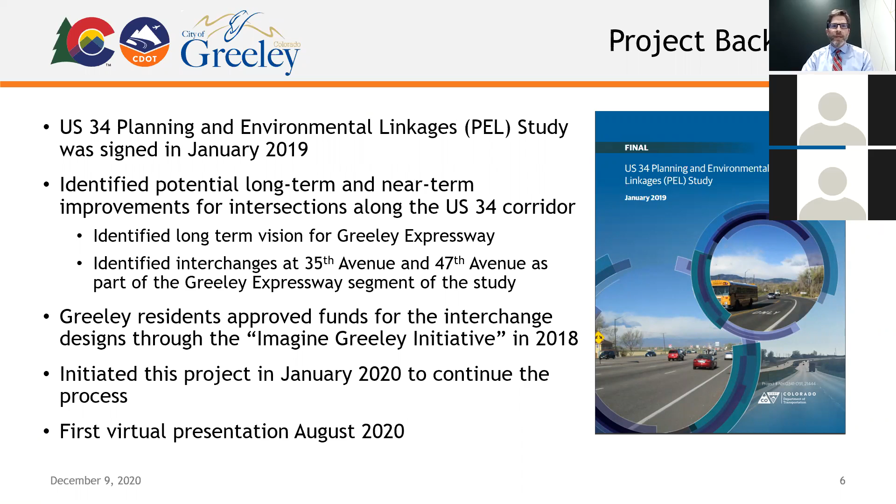The project team has analyzed traffic conditions and developed multiple interchange alternatives for each location, including some that came from the PEL as well as others. We looked at the pros and cons of each design to narrow the alternatives down to three for each intersection. The rest of this presentation will cover how we determined which alternative to recommend based on screening criteria and, very importantly, the feedback we've received from you.

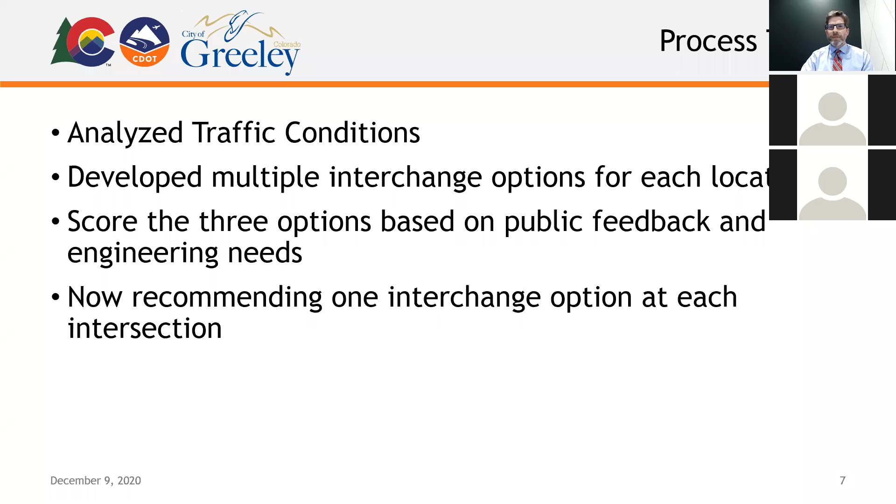We held the first virtual presentation in August to present our work on the project so far and gather your initial feedback. Three interchange alternatives were presented for each intersection, and your feedback was very helpful for us to evaluate and determine a preferred alternative.

Social media posts linked to the presentation were shared from CDOT's Facebook page and by the City of Greeley through its Facebook, Twitter, and Nextdoor accounts. By using these platforms, the presentation reached close to 5,700 people, which we were really excited about. 706 of those people engaged with the post and 355 people watched the video.

We received comments through the social media posts and asked viewers to complete a survey following the first presentation so that we could gather specific feedback on how you interact with US 34 and how you'd like the project team to prioritize design criteria. Most of the feedback we've received so far has been supportive, with a lot of excitement for the project and a strong desire for improvements that reduce congestion and improve safety.

Next, we're going to look at how we've screened the various alternatives we'll cover later. A lot of the factors we consider when comparing different designs we'll go over here. In addition to reducing future congestion and improving safety, we also looked at ways to minimize impacts to surrounding properties and ways to protect the natural environment, such as wetlands, air quality, and endangered species.

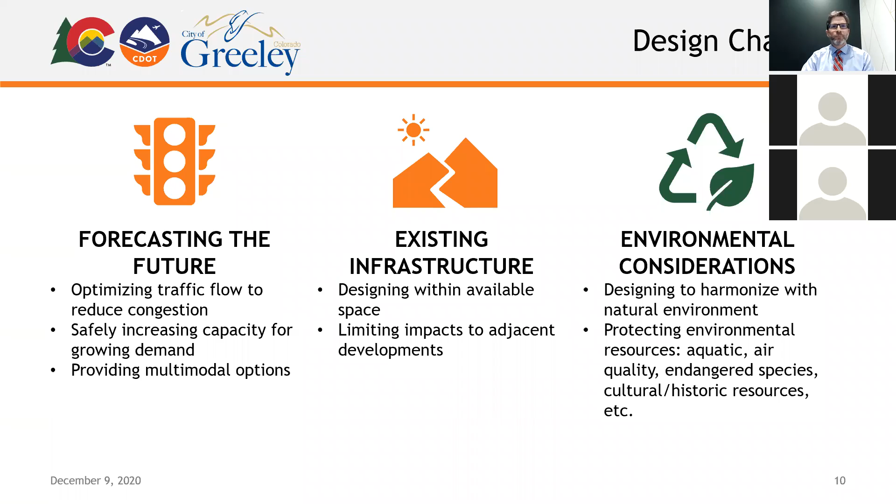The primary goal of the project is to improve safety and relieve congestion, which we can all appreciate at both intersections. 47th and 35th have the second and third highest number of crashes in the corridor, and well over half of those crashes at both intersections are rear-end crashes. Regarding congestion, traffic is expected to increase by more than 20,000 vehicles per day between now and 2045.

Multimodal connections like the ones called out here on this slide have also been emphasized during design. Together, all these considerations contribute to designing infrastructure that can handle future growth across multiple modes of travel.

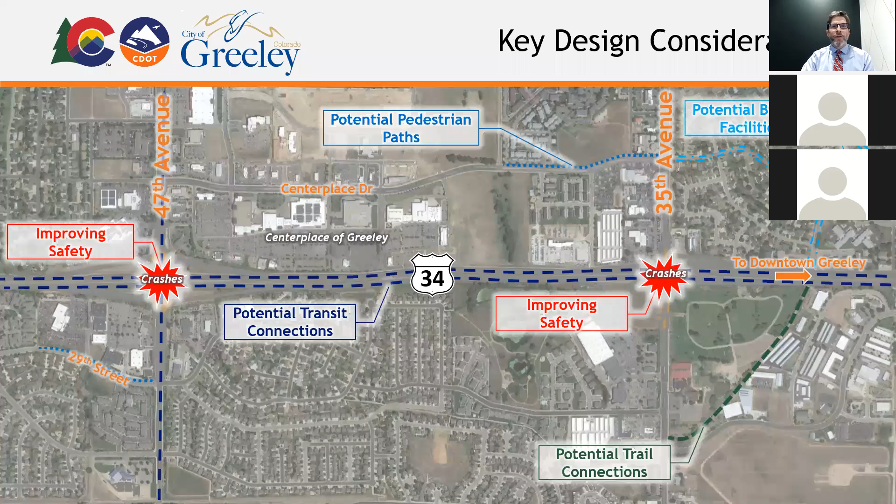Goals for reducing emissions and improving air quality are also important during design. Interchanges can increase average travel speeds and improve free-flow traffic. This ends up decreasing emissions because fewer vehicles are idling in traffic, and at the same time the time spent in traffic is shorter. Less emissions improves air quality and reduces long-term respiratory health risks.

For this project, it can be expected that, in the morning peak hour, congestion occurs. Removing the signals by constructing an interchange may reduce emissions from cars idling by approximately 0.01 tons. While this may not seem significant, a reduction like this would accumulate throughout the day and over the course of the year, so it does add up.

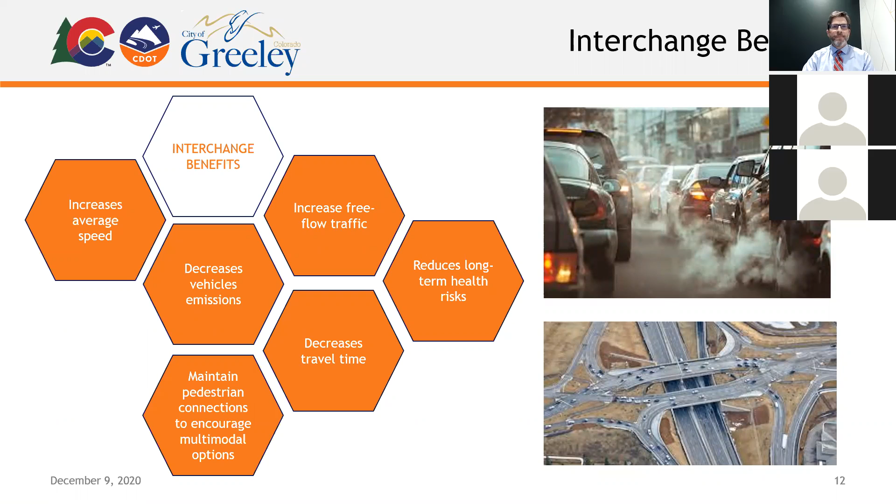Since then, we've done a detailed alternatives analysis based on public feedback and design engineering. We've looked at 6 screening criteria in more detail and used your feedback to set up a scoring system to select a preferred alternative for each intersection.

Here are some of the things we considered when looking at each intersection and the screening criteria. For safety, we consider things like the number and severity of crashes, as well as bicycle and pedestrian safety. The survey feedback confirmed that many people don't feel safe to ride a bike or walk near either intersection.

Regarding congestion, we look at how well the design reduces time spent sitting in traffic and how it improves travel time. Access to driveway and side streets are also considered.

Environmental criteria may include impacts to noise level, parks, and as we just covered, air quality. Criteria for multimodal considerations includes maintaining bus routes, ADA access, and improvements to bike and pedestrian comfort.

For property impacts, we look at how much space we need to design for each design and whether the project would need to purchase surrounding right-of-way.

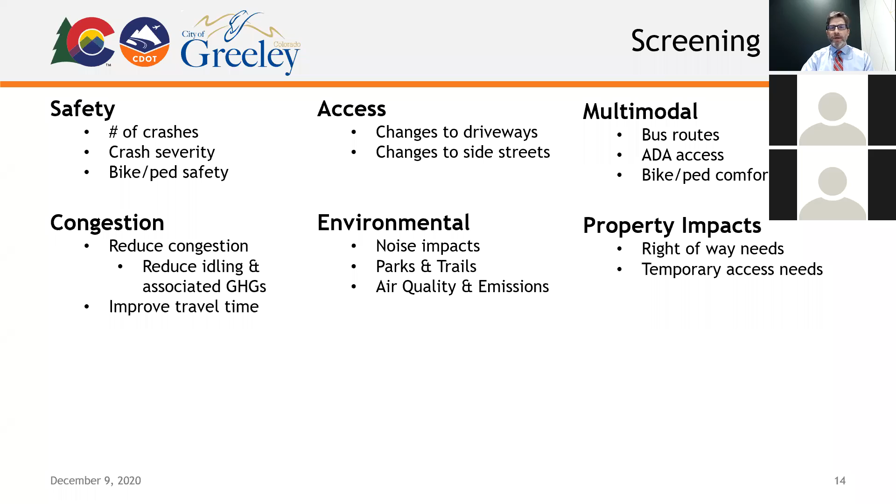We've also received feedback encouraging us to continue to look at multimodal access, as well as transit improvements and prioritizing safety.

Before we discuss the selected design for each location in detail, we're going to briefly go through 3 alternatives we've scored for each location, starting with 35th Avenue.

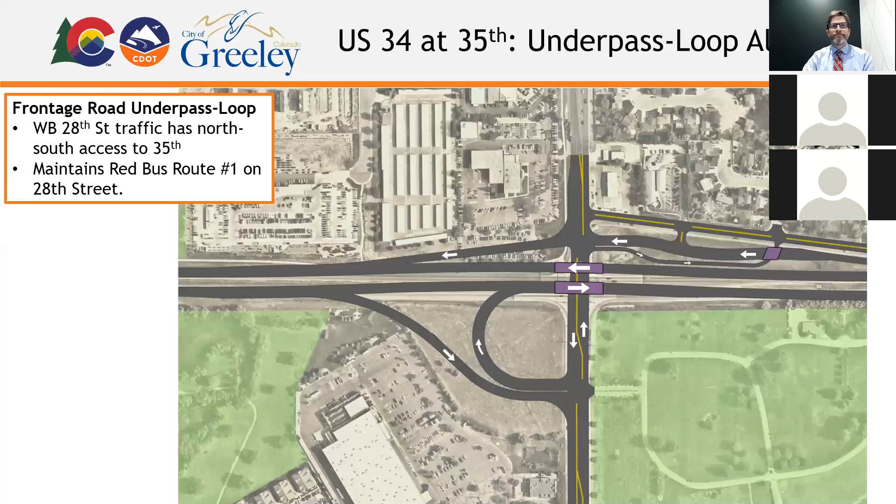The second alternative here is a tight urban diamond with a loop. This alternative would have a longer bridge carrying US 34 over 35th. Drivers would use the ramps to get on the freeway like the previous design, but the northbound traffic from 35th Avenue would use the turnaround on the east side of the interchange to go west onto the freeway.

Traffic on and off ramps would flow freely in this case. This design ranked second of the three, but the difference compared to the recommended design is its scoring on accommodating multimodal alternatives and safety.

Our third option for 35th is a partial diamond interchange and loop. US 34 would also go over 35th with a bridge, and drivers would use ramps to access the freeway. The 28th Street intersection will have a 3/4 movement that eliminates westbound traffic or westbound left turns with partial signalization for both northbound and southbound traffic. The red bus route number 1 would stay the same for this option too.

This option scored the best against the other two because it had the highest safety rating among all the alternatives, in addition to scoring on par or higher on accommodating multimodal options.

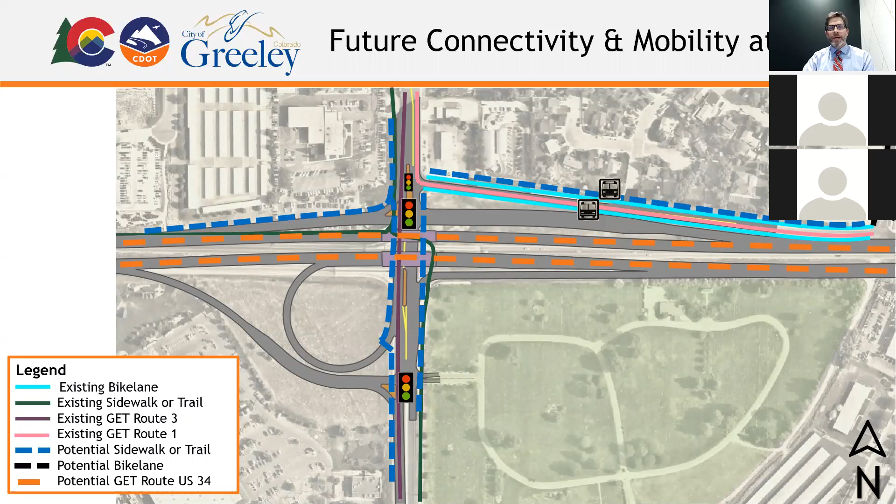As you can see there, this is a really unique interchange configuration.

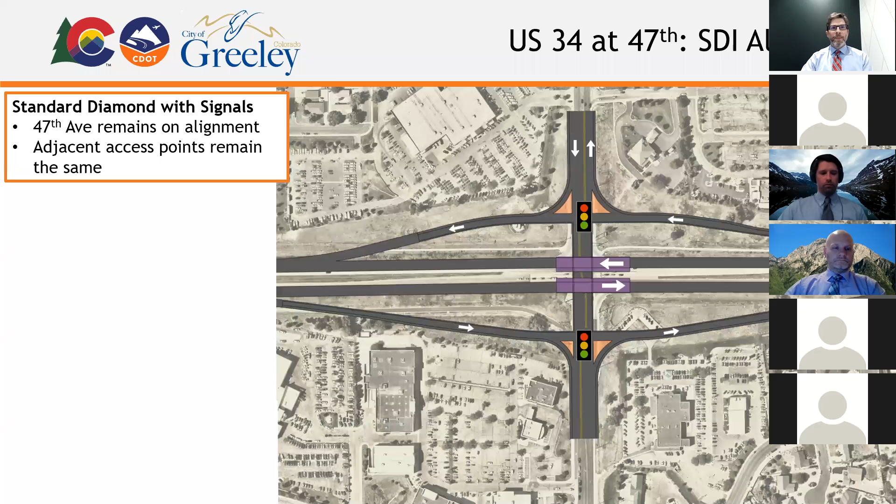The preferred alternative here is the innovative diverging diamond interchange, or DDI. It ranked the highest because of how efficiently it meets goals to improve safety and congestion. It also scored best in multimodal accommodations. The design here will give drivers direct access to the freeway ramps, so there will be much less sitting in traffic and waiting to get on US 34, which we can all appreciate.

With the DDI, we can nearly double the number of drivers that will be able to turn left, and drivers will not have to sit and wait at signals, but will be able to flow freely onto ramps to access US 34. This design removes left turns across traffic and the crashes that can result from those left turns. It's also a flexible design that leaves room for future expansion as local travel demand increases.

While the safety improvements here set the DDI apart from the others, it also scored well in both multimodal accommodations and future flexibility.

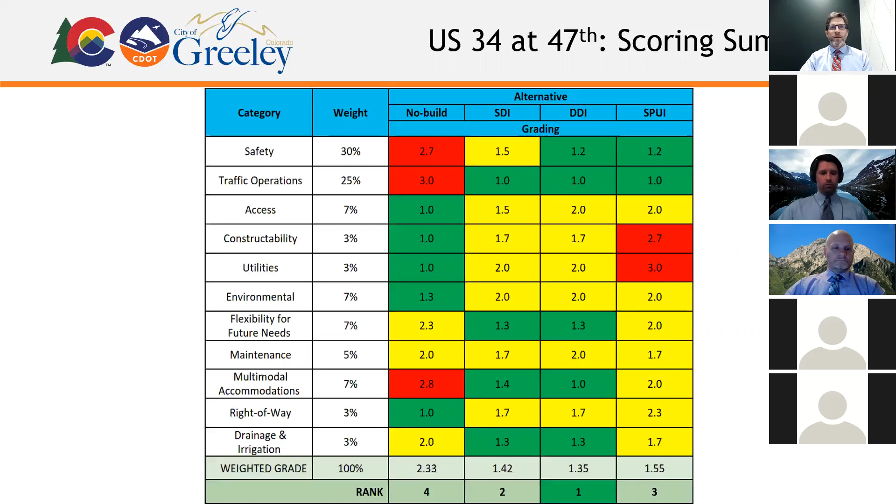You will stop at a traffic light. When the light turns green, you will simply follow your lane to the opposite side of the roadway. Be sure to stay in your lane and watch the roadway. For those of you looking to go onto the highway, stay in the left lane and look for the roadway to shift to the left. Remember, at this point, you would have traditionally been stopped at a traffic light with your blinker on. Instead, you are continuing to move on to the intersection and onto the highway. To continue through the interchange, stay in the center lanes. Your lanes will cross back to the right in their original pattern. If you want to enter the interchange from the right, stay in the right-hand lane.

Okay, you will stop at a... I knew I was going to do that.

Similar to 35th, 47th is also a unique interchange from a user perspective.

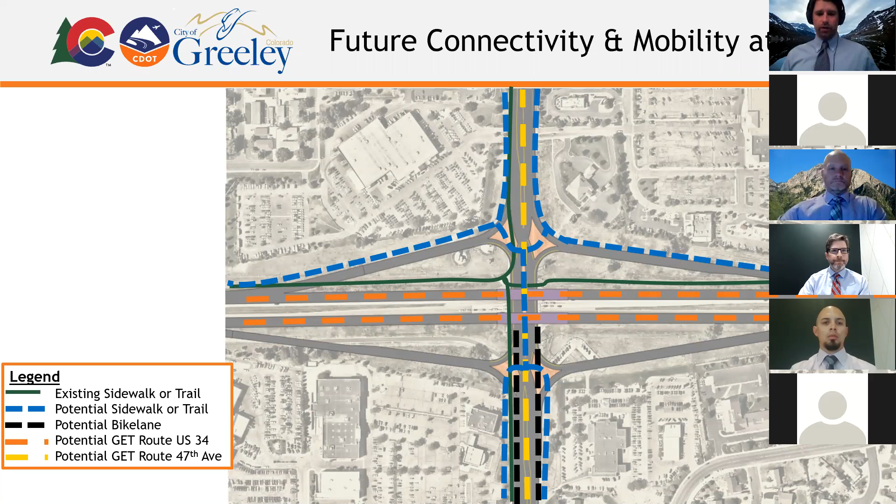Great. So let's move into the next couple slides here, so we can get to the next Q&A section. So that's me, isn't it?

Looking at the next steps, we're going to look at our project timeline and phasing, as Jason was mentioning. At the beginning of this year, we were focusing on starting the project, getting the traffic studied, and looking at the interchange alternatives. Right now we are at preliminary design, and we'll be looking to wrap that up in the first quarter of next year. Then we'll be moving into final design, with the idea of wrapping that up in Q2 of 2022.

We do think, at the earliest, construction could start Q4 of 2022. That's depending on available funding, and would last approximately two years, as Jason was talking about earlier.

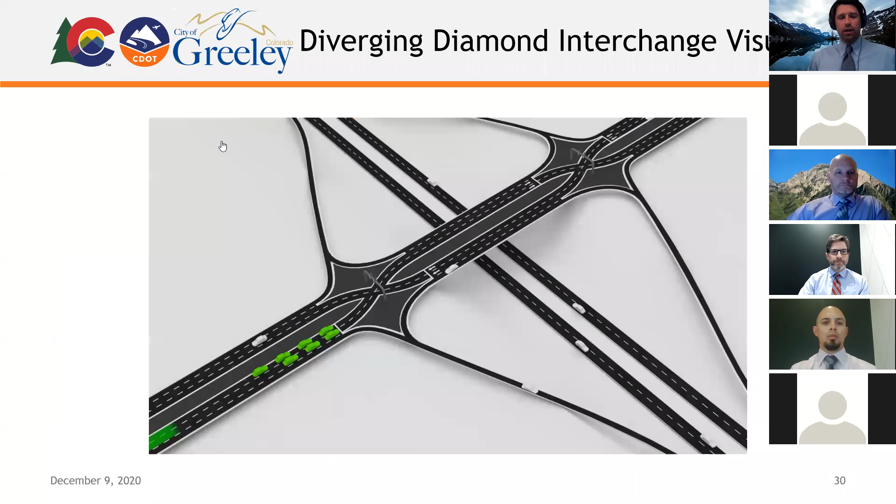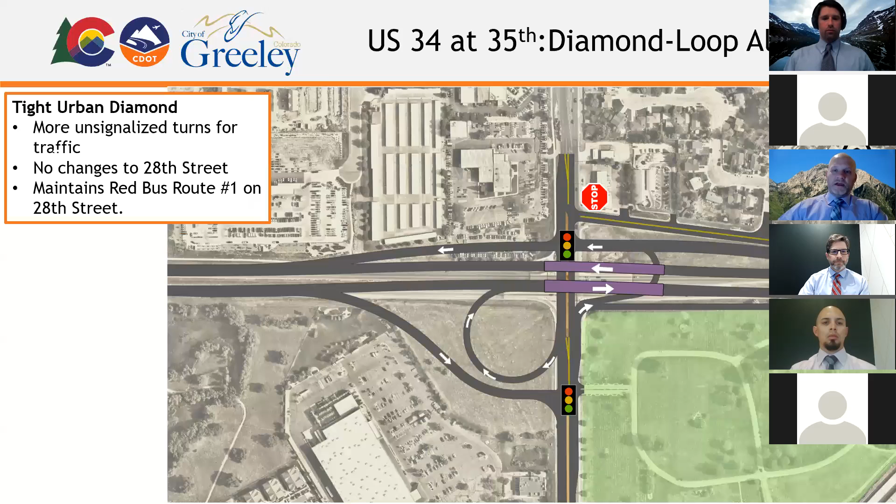28th Street is really close to US 34, and accommodating all of the movements there wasn't possible in this design. But we are able to allow left turns from the north to enter into 28th Street, by having the traffic signals coordinated and working together with one controller. Whenever signals are really close to each other, we can use one signal controller to control lots of movements using overlaps, where certain movements occur at the same time. That's what we'd do with these intersections located close together.

Cordell, sorry, I think that question may have been for 47th. I still think that's really valuable info since we've gotten questions on 28th as well. But Ed, if you could repeat that question, and then Cordell, maybe you could talk about the signals on 47th.

Okay, sorry, I thought we were talking about 35th. No worries, Ed, the question was about 47th Street and two signals. I believe so, yeah, and I answered it and it got filtered out. So maybe just address how we're going to navigate the two traffic lights, one on the north side and one on the south side for the diverging diamond, and their proximity.

It's actually a very similar answer in this case. This signal would likely operate with one signal controller, and there are different ways it can be timed based on the time of day and where the heavy movements are. We can prioritize traffic coming off of US 34 to get through both signals without stopping, or prioritize northbound or southbound traffic to go through without stopping. This would be an operational decision that the city and CDOT would refine based on the time of year, time of day, and day of week to get the signal timing plans right. But the quick answer is one signal controller would operate it to minimize delay for the most people possible.

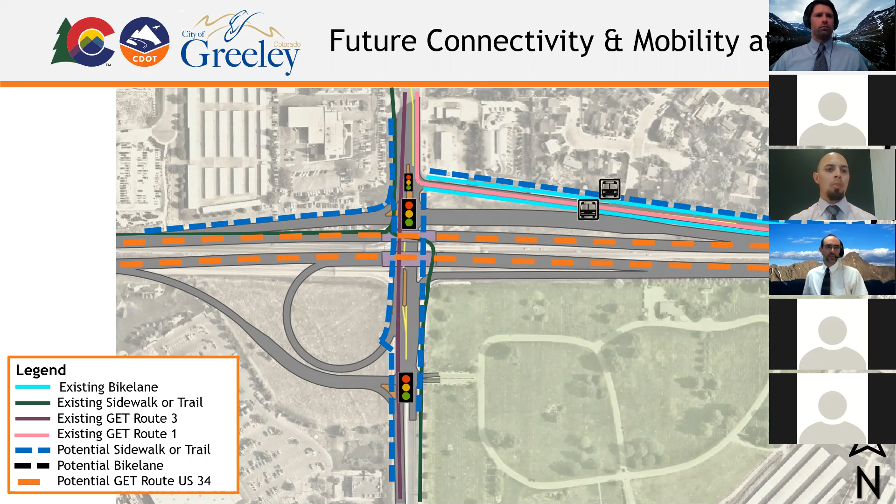As we work through getting some utility information, we've got some substantial and fairly large utilities in both locations, so we're just getting that information in over the last couple of weeks. There's a possibility we could end up lowering one of the existing roads, but right now our plan is to leave those at their current elevations and take 34 over both of them.

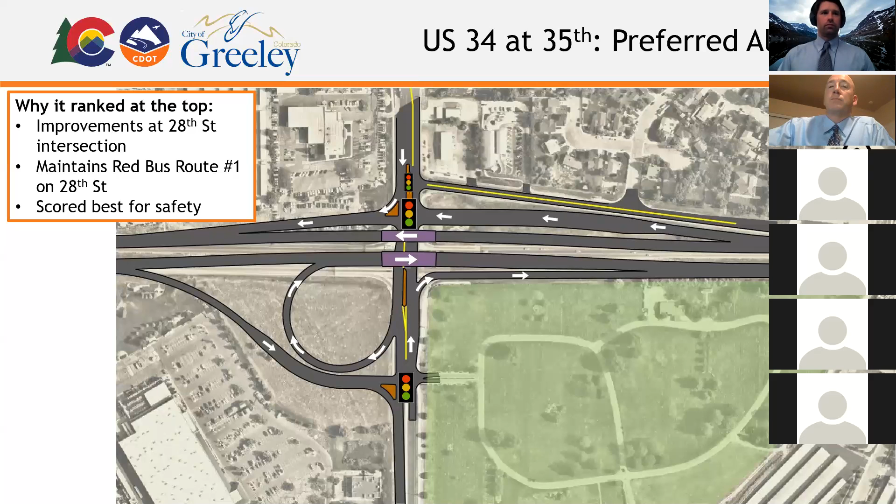This might be a bit future focused, but Chad's asking about how construction is going to be managed. Are we thinking about addressing construction for both interchanges at the same time, or will it happen separately? He's concerned about restricted traffic on the north side, both intersections at once, and not being able to get out of Center Place either way.

That's something we can address from a CDOT and Greeley perspective. Dan, if you want to address that one. Yeah, sorry, I don't know if I missed the previous question, it was cutting out a little bit, but thanks Joel for jumping in on that.

As far as the construction goes for these two, part of it depends a lot on funding, as we've said in the presentation, and the funding that's available. Whether we can do them both together would be ideal, but it just depends on how that funding comes in for the construction phase.

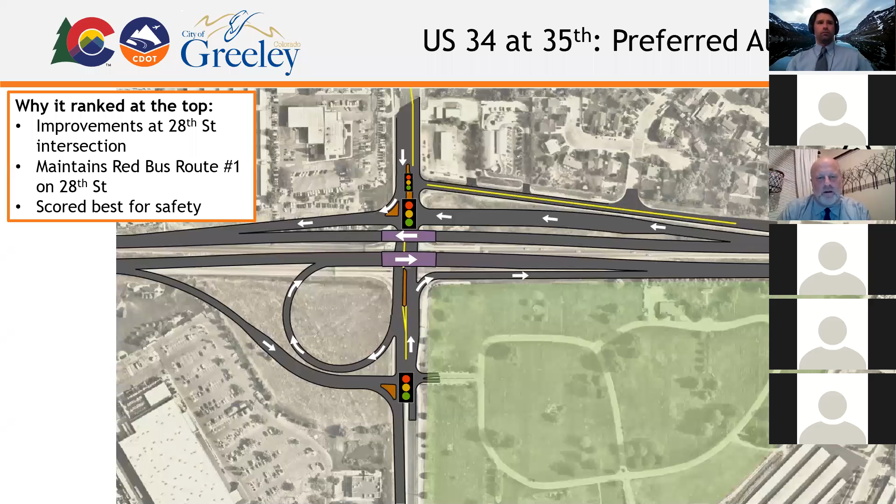But like we said, it'll take about 2 years, I believe, and we would manage them together. Obviously one of the things is we always try to keep the traffic flowing, and traffic control is a primary part of our construction, to keep everybody moving through the intersections as we do the construction.

Thanks, Dan. Was there anything else I needed to answer on that? Did that answer it? I think so. I think you got the main points there.

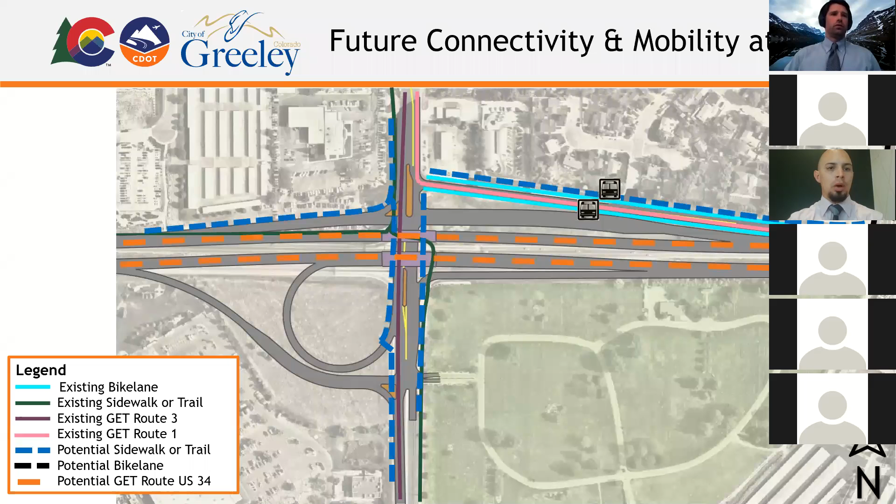Maybe Jason, this is talking about some of the scoring and matrices we had there. Did we consider the phasing plans and constructability in our scoring? Yes, we did, and that might be a better question for Marcus, because I know he's looked at that as part of the alternatives analysis. Marcus, would you mind jumping in on that one?

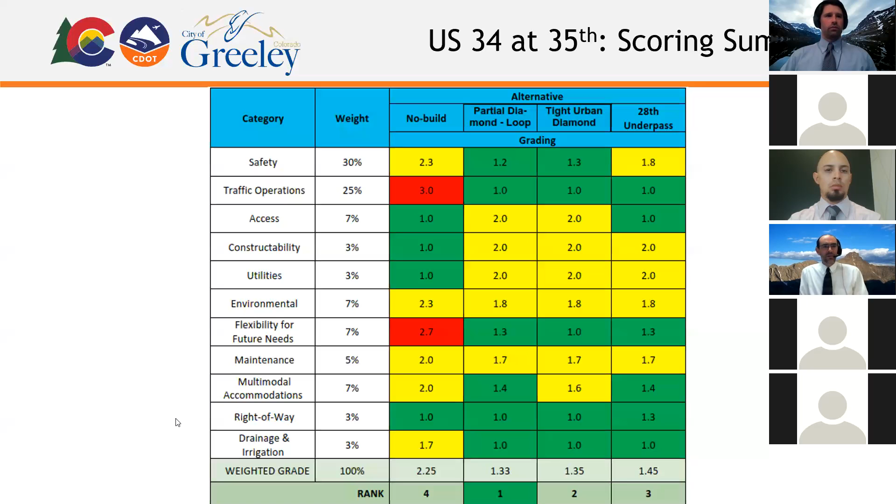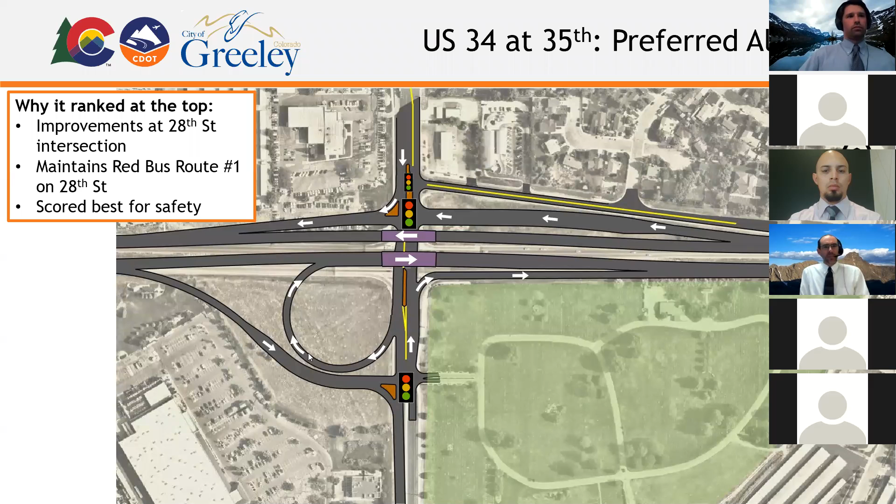Sure, so yes, we did look at how we would build it. This mainly affected the 35th intersection or interchange, where we're actually going to do a slight shift to US 34 through that interchange, which would help us build the structure without impacting traffic along US 34 during construction. You can see that the westbound bridge is actually shifted north of the current intersection. That helped us in a number of other design challenges, especially related to the cemetery.

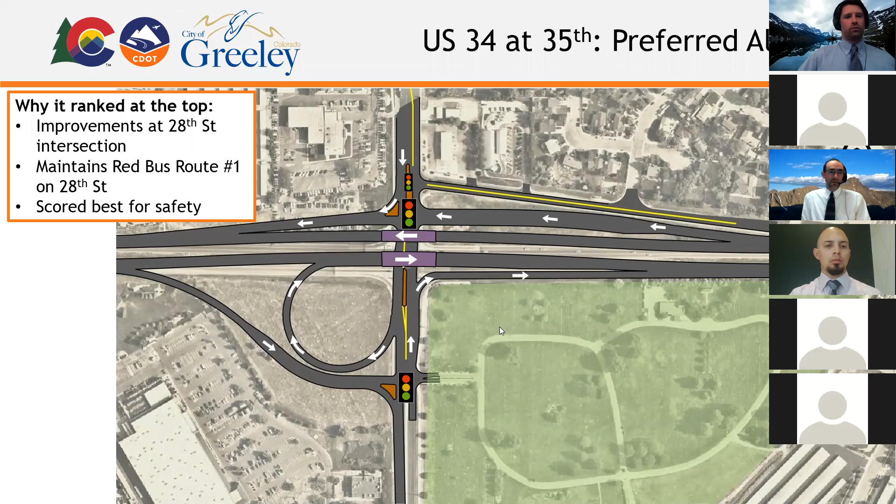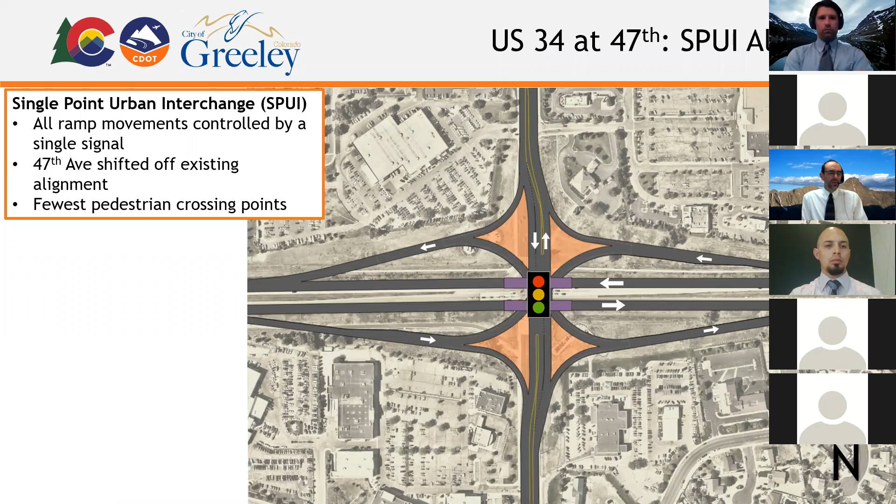We also looked at the phasing of the interchange at 47th, and the plan there would be that we could construct the ramps first, allowing us to shift traffic onto those ramps while we're building the bridges for 34 going over 47th. So the ramps would actually serve the purpose of running the 34 traffic still through the intersection.

Thanks, Marcus. And look, I know we're right up at time here, so I think there's one more question I can maybe address, and then we'll move into closing this out.